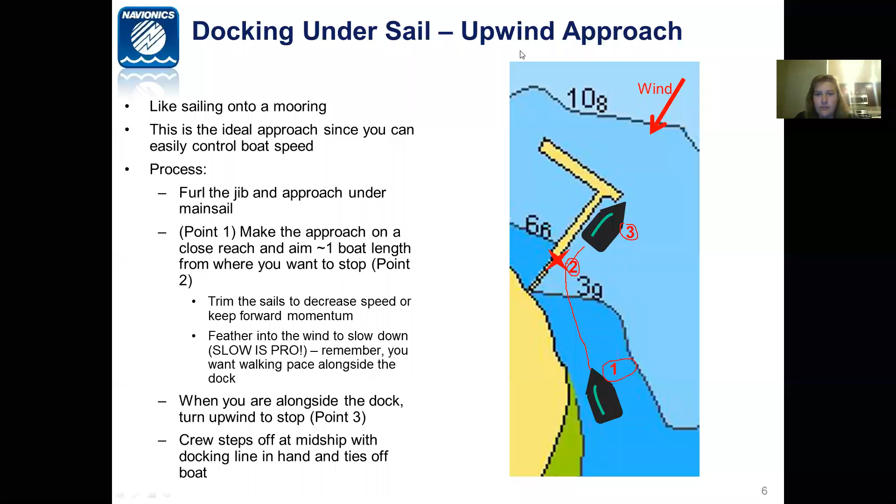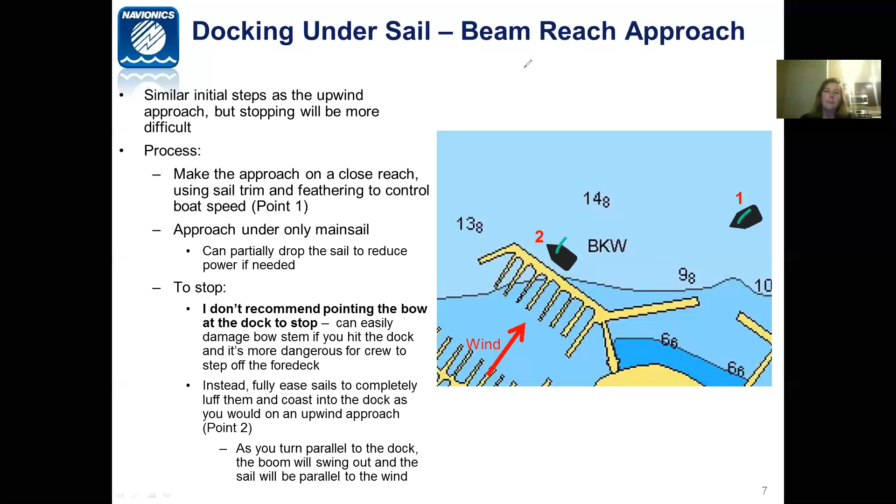So in this scenario, like I was saying before, hopefully you could try to make the upwind approach. So maybe a better approach in this case would be to come alongside the dock, maybe position your boat farther over here, make the approach and feather up and try to land on a dock that's pointed more upwind. So that might be a little bit safer if you can maneuver that way. But the beam reach approach is just as doable.

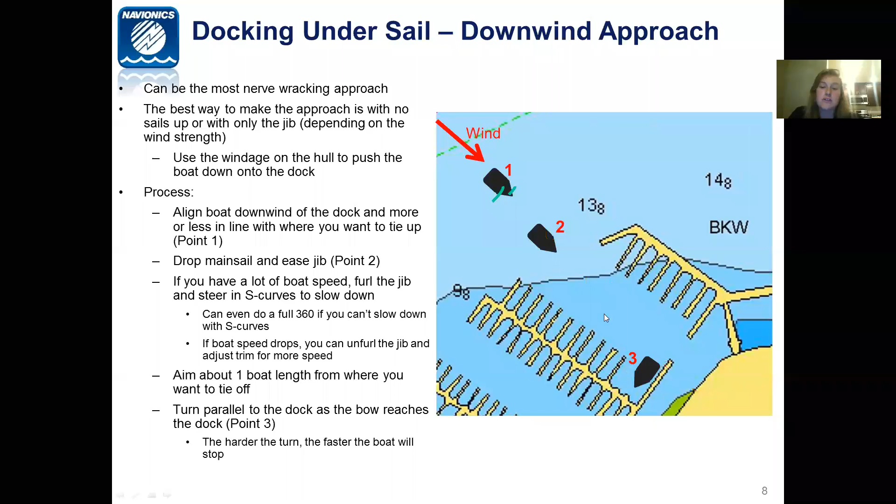So this one can be nerve-wracking, but it's fairly straightforward. Position yourself just upwind of the dock, drop your sails, furl your jib, and just let the boat drift down under the windage and steer into the dock.

Okay, so that covers kind of the main docking approaches you'd see under sail typically. There are some oddballs. If you have questions with anything specifically, feel free to shoot me an email. But we'll move into the docking under power section now. So again, we'll start off with kind of the steps, the general notes that we have, and they're pretty similar to the docking under sail notes.

So again, know your boat. What's the turn radius of your boat? Again, is there a delay on the helm? Is there a delay when your engine's engaged? Maybe it takes a little bit of time to accelerate or decelerate, especially if you have a much heavier boat.

Again, analyze the conditions, tide, current, what slip are you going to, what dock are you going to. Are there crosswinds present that are going to blow the bow away, blow the boat off the dock? Basically, any environmental considerations, you need to think through those.

So step 3, now you have an engine, so the escape route is maybe a little less important, but it's still something that you should be thinking about. So again, if you have to bail, make sure you're not bailing onto rocks, onto other boats. Once all of that's processed and you have it in your mind, step 4 is to, again, prep the boat, top your fenders, dock lines ready, make sure your crew is prepped.

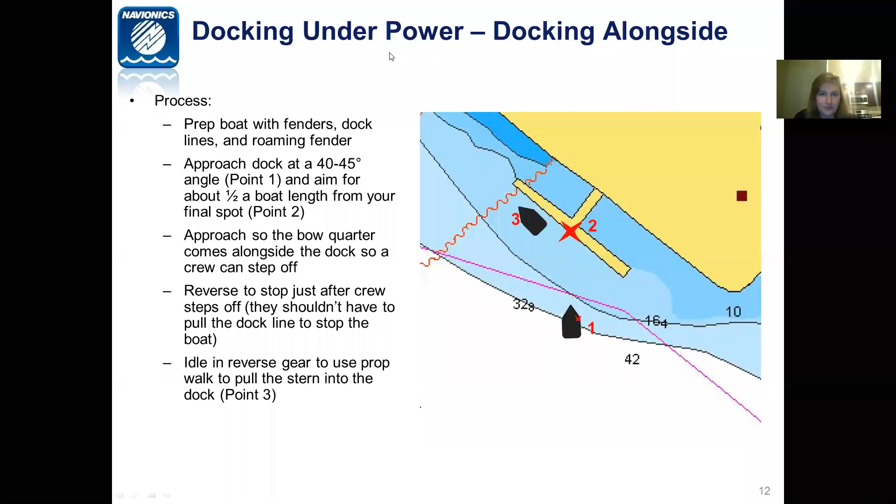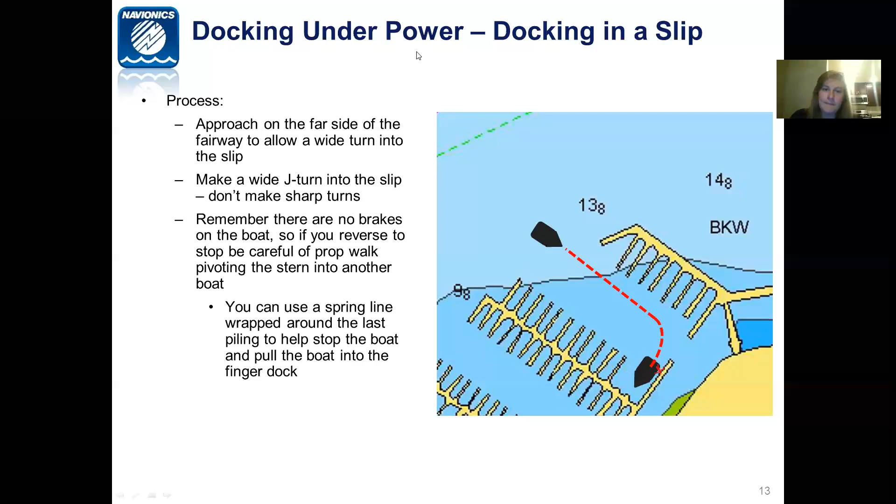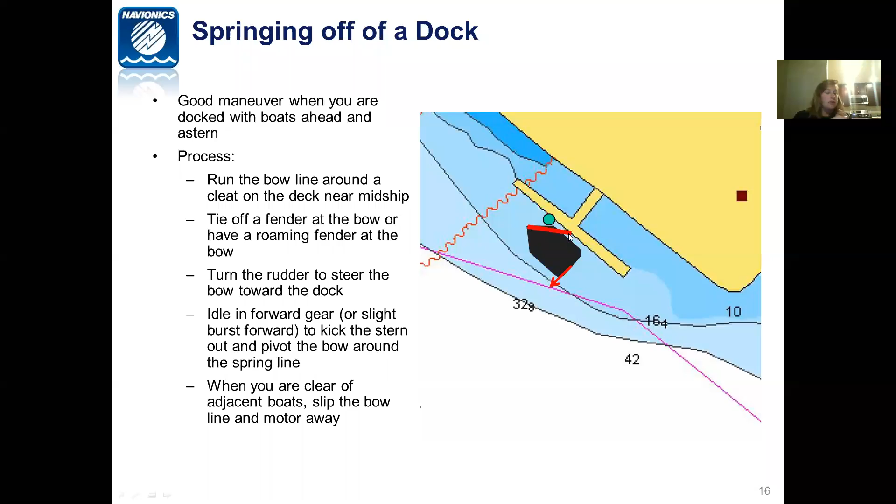And then we can throttle into reverse, back away, drop that spring line, pull the fender up, and steer off away out of there. So the key to this one is to have your spring line tight, and you're going to fight against that to pivot the boat around that fender.

And finally, backing out of a slip in a crosswind. So a lot of times where we sail, the prevailing wind is coming down the fairway. So as we back out, we can get kind of blown in a number of directions. So backing out in a crosswind, again, we would tie a bow line from the very bow to the last cleat on the dock, or as far back on the dock as we can.

If it's really windy, you don't really want to be shy with the throttle. Keep your throttle up, back the boat out so that your stern has traction and will go in the direction that you want. So in this scenario, we want to turn the boat so that the stern goes that way, and we end up heading in this direction here.

So we tie the line off, throttle in reverse, give it good throttle, good traction, get the stern to go upwind, and then as the bow clears the end of the finger docks, we can let this line go and let the bow get pushed down by the wind, and that'll turn the boat and we can motor off that way. If we wanted to turn and head out that way, obviously we wouldn't need that bow line.

You could just let the stern get blown down and then throttle forward. So that would be a much easier situation. But in this scenario, we want to get enough traction, enough speed, power, get the stern to turn upwind, and then let the bow get blown down. If you don't get that traction in the stern, your stern will get blown downwind, and then basically your whole boat will end up kind of on the corner of this finger dock here, and it's kind of a nightmare that you see quite often.

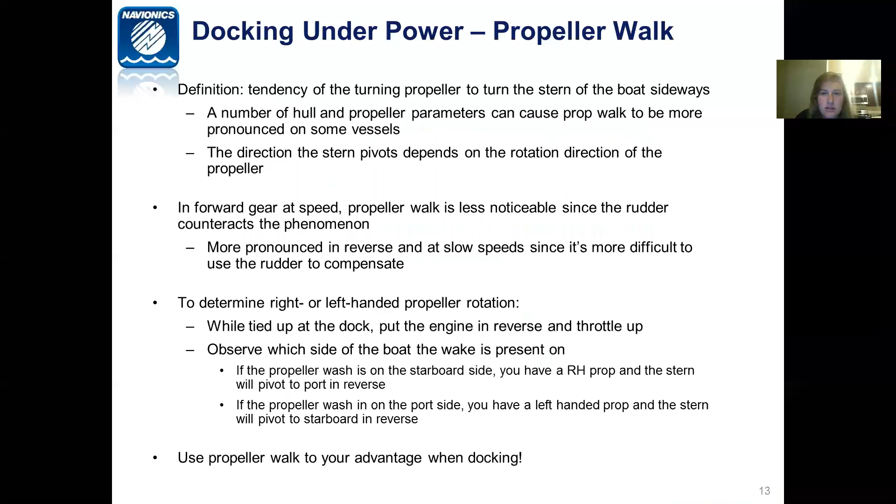That was from an anonymous viewer. Let me know which docking. Do you want just the general steps or one of the specific approaches? Coming into a slip going upwind.

So spring lines, you can have a forward spring or an aft spring. Aft spring on your boat, you basically want them tied off midship. Aft spring would come aft, forward spring would go forward. Your spring line going aft is going to help prevent the boat from moving forward in the slip. And then the spring line that you have tied off that then runs forward prevents the boat from coming backward.

So if you want to use the spring line to slow you down, tie it off midship, wrap it around something aft. So as you pass the piling coming into the slip or pass a cleat, wrap it around the cleat, hold it on the boat so that you can take up any slack or pay out if you need to. And then your forward throttling will fight that spring line and eventually stop the boat. Hopefully that answered it.

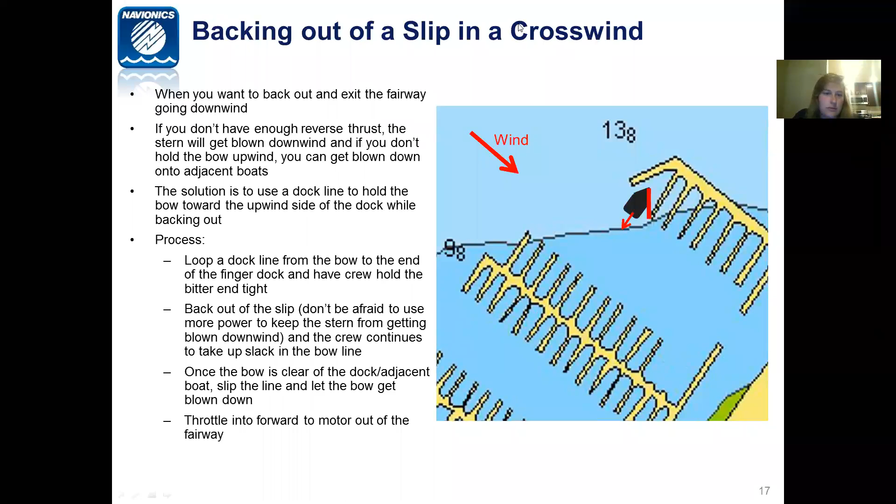Oh, hold on, we got one more. Regarding moving a slip in a crosswind. Okay, so let's go to the screen here. So the question was, moving out of a slip in a crosswind, what if we wished for the bow to be facing upwind? So basically come out of the slip and head in that direction. That's a much easier approach than what I was explaining.

So in that scenario, we can use the wind to our advantage to blow the stern down. So as you start to back out of the slip, you don't necessarily have to compensate as much to turn the boat. I would put a fender, especially a roaming fender, so you can move it as the boat continues to back out, just right along the back edge of that dock. Designate a crew member to hold it and walk forward on the boat as you continue to back out, just to keep it there and protect the boat.

But as you back out, the stern will get blown down into that direction. And then once your bow is clear, you can go ahead, throttle forward, give it a lot of throttle because you're going to be fighting against the wind, and then turn the boat up into the wind that way.

Wind tends to blow your bow around instead of the stern. Are you bow in first or stern in first? So let's say we are bow in this scenario. So let's say you're backing out and the bow is just getting blown into this dock here. We can just take this spring line and put it over.

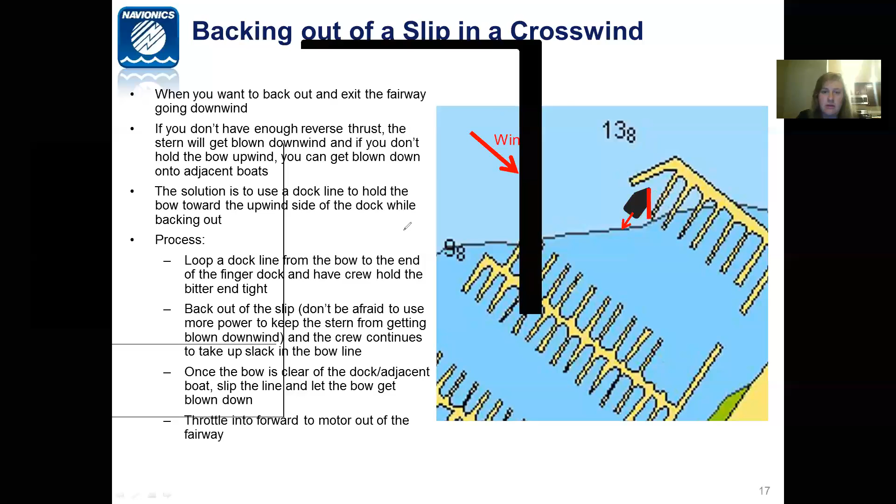One more question. Power coming into a slip with an onshore wind, you have to back to find your slip, and there's another boat in the further slip.